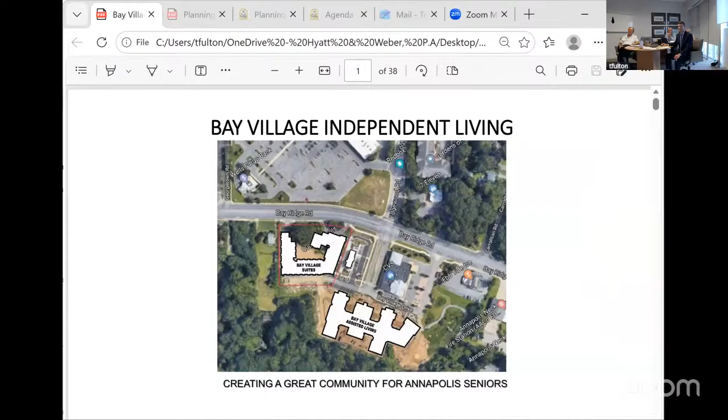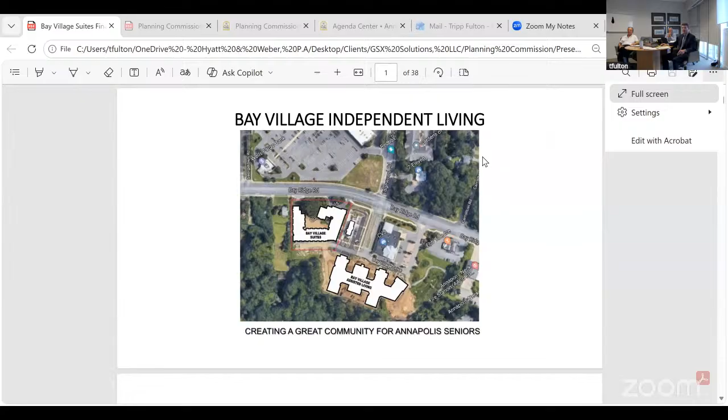There's a way of making this full screen, forgive me. I think that's about as big as it gets. Oh, I had it full screen, there we go. There we go, there we go. It always screws things up, technology.

I'll just stick with it like this. Can you see this screen, Mr. Chairman? Yeah, we can see it. Excellent. John, would you mind introducing yourself to the Planning Commission for me?

I'm John Grant. I run Grant Architects. I'm a registered architect for 45 years, and I actually lived in Annapolis down the street for 33 of those years. I lived down right off the street to the right there, about a mile and a half from the site. I used to drive by it every day and look at it. Subsequent to all that, I came to acquire the site as a developer and architect.

We actually acquired both sites, and one of the important things about this site was trying to create an architectural connection between the two projects and make it contextual so it fits in with our neighborhood. We spent two years in meetings with the community talking about how we could better design the building. Those meetings were very fruitful. They came up with the courtyards and the tree that we saved, and a number of different things. I think as we go through this, you'll see there's a lot of thoughtful things about this that are going to make it a much better project and something the city will be proud of.

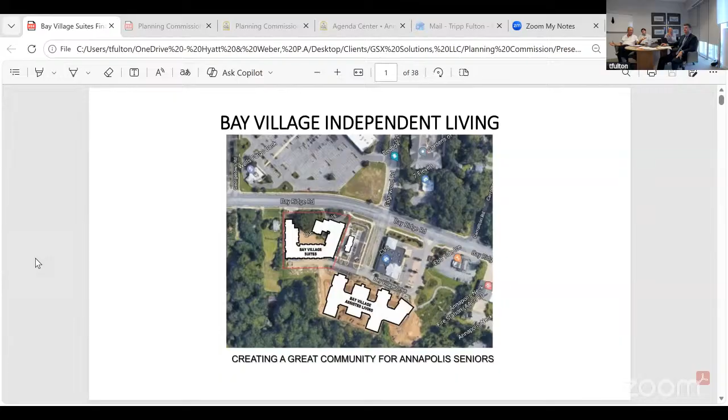Yeah, since we've basically seen this all before, you can go fairly briefly.

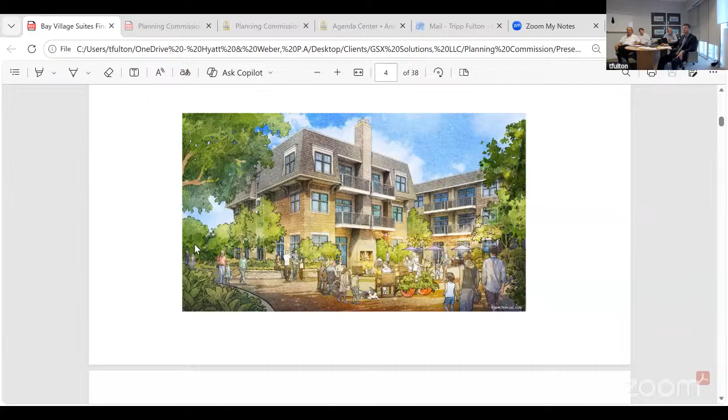The nice part about this is it is sheltered from the sun, so it will be a cooler space—not going to be very hot in the summertime as we're all experiencing today. This is the fire pit right there and the elevation of the building. We're using shingles. We have integrated the same shingle colors and material colors and styles as the assisted living across the street.

These are some contextual studies. The building on the left is the porch on the assisted living, and that porch actually looks at the Starbucks drive-through exit. In fact, in the morning everyone sits on that porch and makes comments about people driving through—it's great, the Starbucks. But as you can see, our facility is on the right-hand side.

There's a rather large sitting area outside, and we have parking under the building, so we don't take up any space on site with parking. You don't have to look at parking all day long, and we don't create a heat island with parking. Everything as far as parking goes is happening inside the building. On the first floor, we have a fitness center, parking, general staffing, and kitchen.

This is the view from a little bit further back. You can see where the Starbucks is and where that drive-through is, and the front end of our building. So this was a contextual study. I just wanted to show you those, knowing that when we went through our original planning review, we proved how this building contextually met the standards of the existing neighborhood and area.

Hey John, Diane Butler's got a question. Sure, Ms. Butler, you got a question? Yeah, if you could flip back to the last slide, that would be terrific. One second.

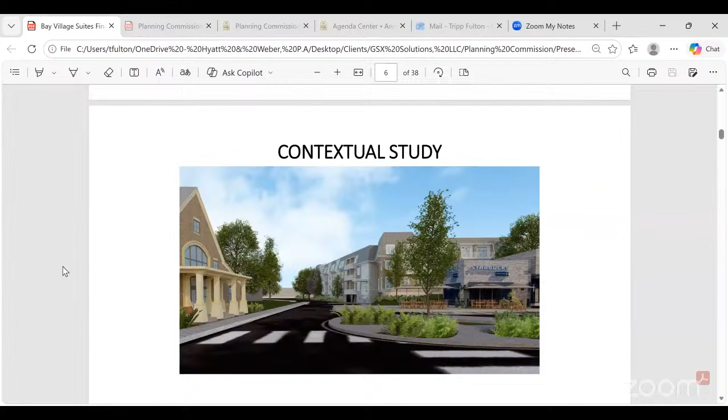I think this slide does a great job of depicting the differences in the architecture between the two buildings. I'm wondering, why didn't you go with a consistent theme with the existing buildings for assisted living? They're drastically different. I think it looks a little odd personally, but what was the thought process in making them so different? Actually, this rendering color-wise is correct. The colors are pretty close to the colors of the assisted living, and so are the materials with the shingles.

I'm not sure. You have to understand, this all happened and was put together in 2019 and 2020, so there's been some evolution in terms of the elevations, but the renderings I showed you from the internal side are pretty much right on in terms of color. You want me to scoot back to them?

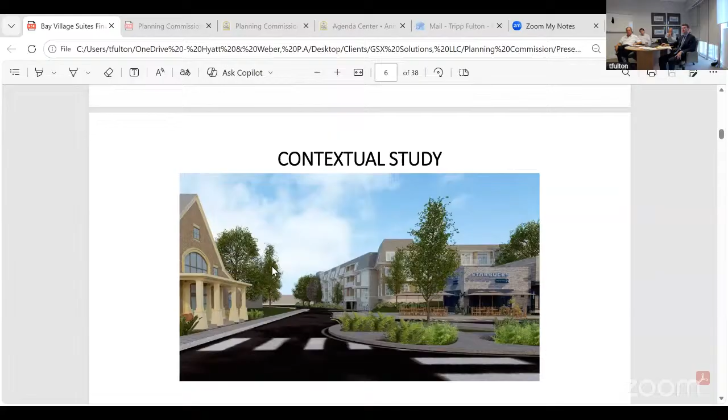Yeah, it's interesting, John. It's really not the color at all that matters. It's that kind of, I don't know what that roof type is called. It's not mansard, but it's just totally different.

It's a mansard roof, and when we went through the project study, since they wouldn't allow us any additional height, because we originally planned it with pitched roofs, they forced us to go with mansards, and as a result we had to saw the building off the top, so to speak. That pretty much is it, from the front and the back. We actually thought it would have been much better if we could have bumped the roofs up a little bit, but there is a hard cutoff, I think at 45 feet.

If you could get an exception, would you do that to make it fit and create more consistency in the architecture? I'll put it this way—I'm not unhappy with it as is, because the buildings are not the same building. One is a residence for seniors, and the other is assisted living, which requires more care. It's flatter and laid out that way because we're dealing with a lot of non-mobile people, moving them up and down hallways. So I don't mind having two things that aren't exactly the same. The materials will bring the two together, and also the two management companies will be the same—Sunrise will manage both facilities. So I don't think at this point it would serve us to go beyond this, because this was what was approved.

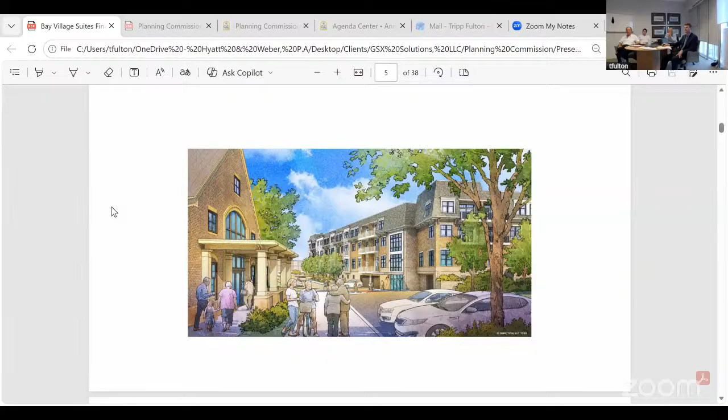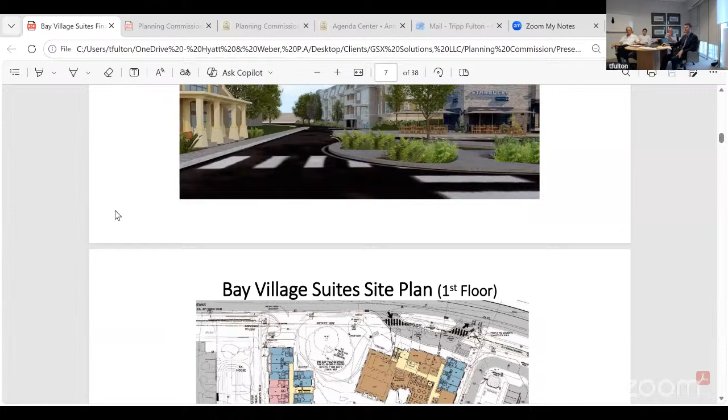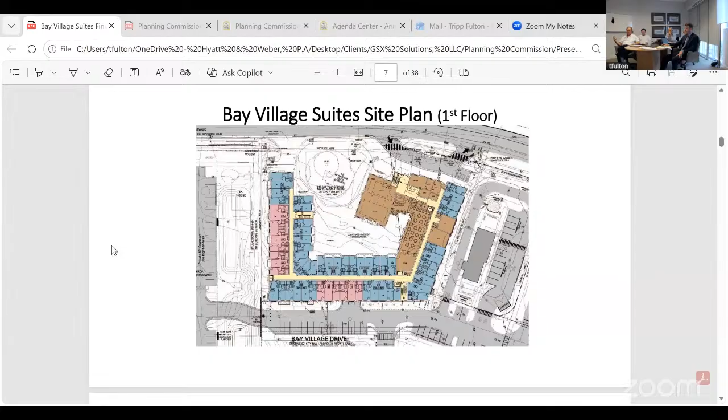Keep going—so that's a parking garage on the first floor. Well, you want to drop down to the first floor plan. So the first floor plan here shows where that courtyard is, and Shelley will get into it in greater detail. As you can see, up in the upper right side of this plan is all activity space—living rooms, dining rooms, a bar, outdoor meeting rooms, a fitness center, and things like that. Then you have a collection of apartments, and these are not assisted living units, these are actual apartments—1-bedroom and 2-bedroom apartments that give people a sense of still being in charge of their lives. There's a kitchen in there, but they get 2 meals a day along with the package.

This is the first floor. The parking garage is fed off of Bay Village Drive from the back. We have a number of lobbies in here, and 78 parking spaces—either 78 or 77. So we have more than enough parking spaces for the seniors who live here. I read that the requirement is 79, and including the street, you've got 86, so you're supplying more than required. I had a question—I can't remember whether I asked this the first time around, but are the spots a la carte?

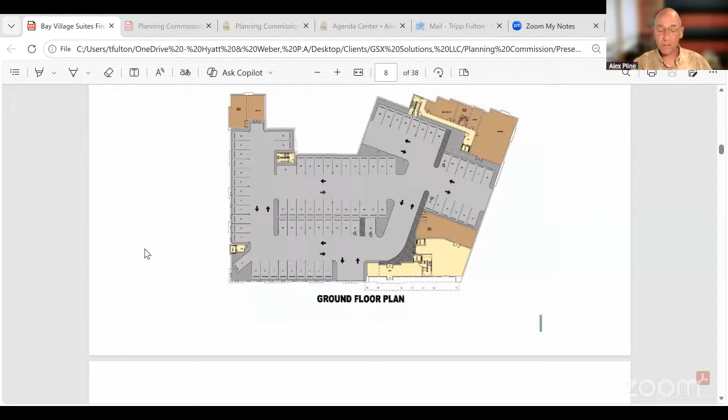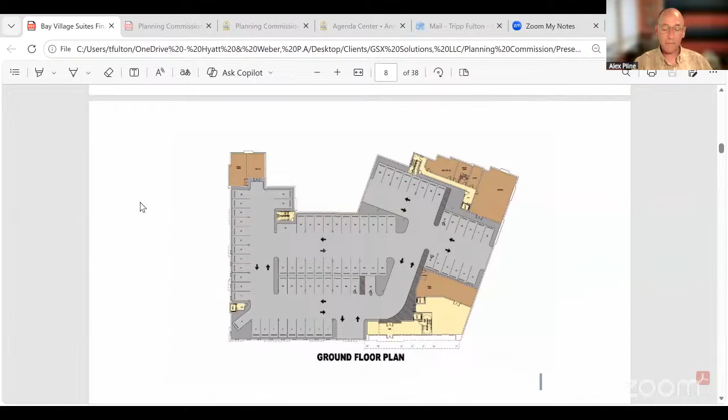So is it something somebody would pay for if they wanted it, but you don't automatically get one? Well, the indoor spaces are part of the payment program, and since the outdoor spaces are attached to us, we have to have those for our guests. You have 105 units and not 105 spots, so—yeah, at this age, Mr. Pline, not many of these people will still have cars. I understand, but I'm curious if you want a parking space a la carte, you basically have to pay for it. Yeah, if you have a car, you're going to pay to park it in there. I like that, because that way if somebody doesn't have a car, they don't have to pay for it. Oh yeah, it's totally a la carte.

That's the first floor plan again. Keep going. And that's the second floor plan, which is all residential.

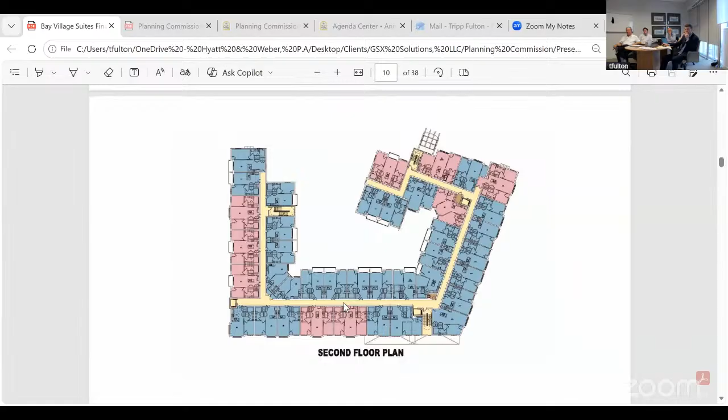You can see we have 3 elevators around the building, so that you have the vertical connection at all points of entry: the garage entry, the front entry, and the rear entry.

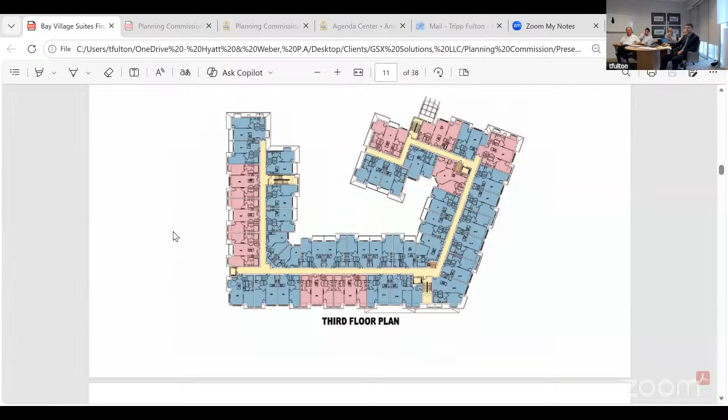And that's the third floor. It's the exact same as the floor below, so we have a nice mix of 1-bedroom and 2-bedroom units.

This is the shot coming in right there where the CVS pharmacy is. You can see the Starbucks and our project in the background.

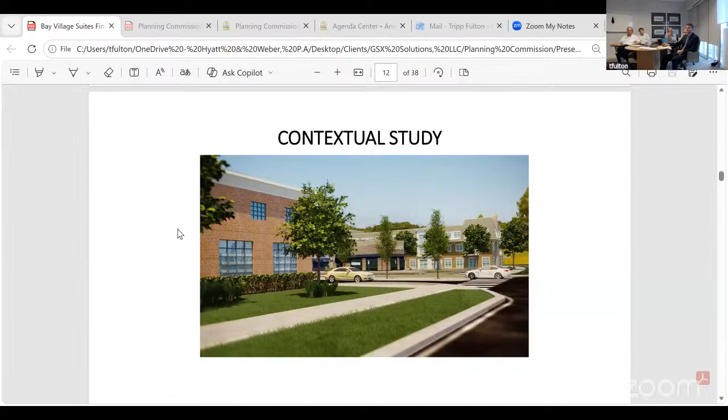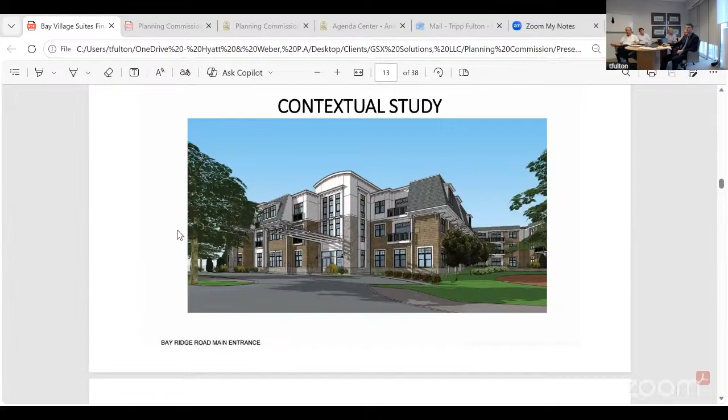And there's that front entry coming in. There's a porte cochere there to drop people off, and a space for people to drop in and out. A number of these people will probably order Ubers. I think it's only $5 to Uber to downtown.

And along the rear, we have a large outdoor porch at the back with seating. So it allows people to sit along that street in the back and animate the street a little bit, and also creates a stopping place for people as they walk between the 2 buildings.

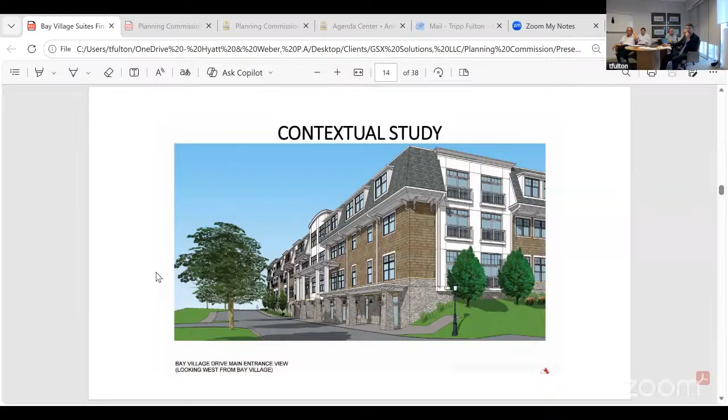So that's pretty much the site overview. Turn it over to Shelley.

We're actually going to skip over to Terry Schuman. Before I do, I guess I'd ask one more time, Mr. Chairman, if you or any commissioners have a question for Mr. Grant, we're here to answer them. Yep, I don't. I'm sure other commissioners will chime in if they do, but thanks.

I'll turn things over to Terry Schuman. Terry's our civil engineer on the project. He was the engineer of the first go around.

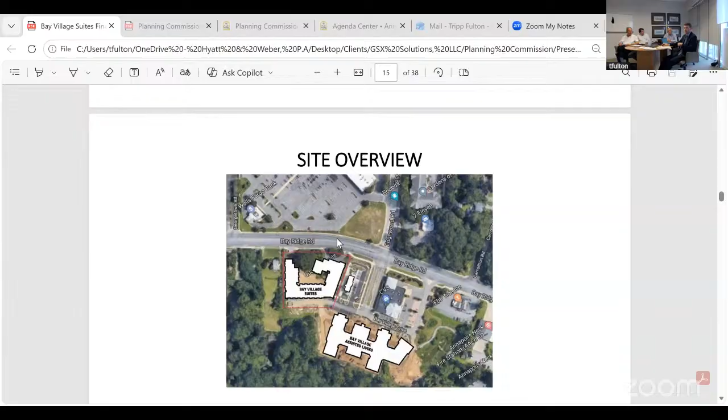Terry, do you mind giving your name and address for the record? Everybody, Terry Schuman, now with Atwell. Previously I was with Bay Engineering, and now I'm with Atwell, same company that just took over Bay Engineering. So I've actually been on this job since 2004 when we first started.

So Bay Village subdivision is with the 4 lots. This is the last lot now being developed. The other 3: the CVS first, then the Starbucks, and then the assisted living.

And I just wanted to point out, from that plan right there, this is the limit of the city for our 10-acre subdivision here for Bay Village. Everything on the left and the right and the south are in the county.

And then the city limits go back on the other side of Bay Ridge Road. So we've got Bay Ridge Road on the top, we have Bay Village Drive in the middle of this site, and that serves the three developed lots, and then our future lot 1 is what we're calling it.

Again, our site is 1.8 acres. I'll point out too, the Quantum Sales was not in the original subdivision back in early 2008 when this first started. That has now been purchased by GSX and eventually will be consolidated with lot 1 and with Bay Village Drive as now the new lot 1 for this project, which totals 1.8 acres. It also has an address of 960 Bay Village Drive, and the Quantum Sales is at 951 Bay Ridge Road.

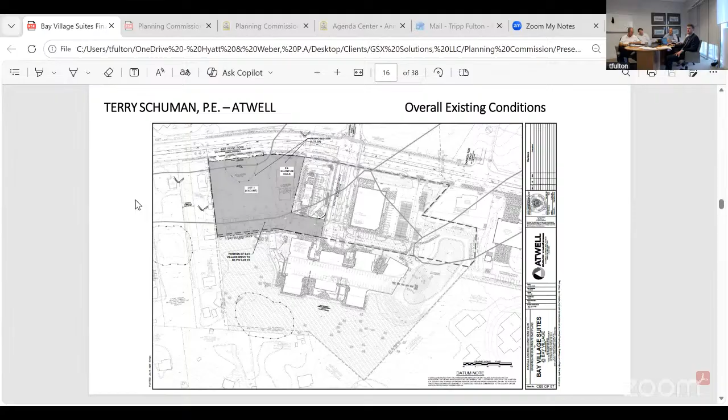You can move on to the next one.

So a couple things on the existing plan. The circle up top there, that's the critical root zone for the tree. It's a 52-inch white oak, considered a specimen tree because it's over 30 inches in size.

And that, as well as the topography. The topo goes from about an 8-foot elevation difference from Bay Ridge Road down to Bay Village Drive. So those two features really designed that site. We were attempting to save the tree and also work with that topography. So if you go on to the next plan.

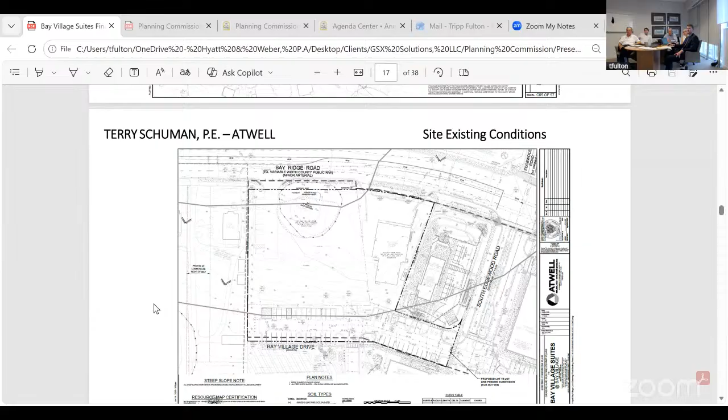And that's just an overall plan, and that shaded area there is essentially the building. From the views from Bay Ridge, it's 3 stories over top of a parking garage, and you access the parking garage off of Bay Village Drive. That makes up that 8-foot elevation difference between the two. You can see the tree there is being preserved, and the building was designed around that.

As indicated before, Bay Village Drive will extend to the property line. We are regrading Bay Village. If you go out there today, Bay Village Drive is already paved. When we were working with Lidl on the connection, it was too steep a grade, so they're going to have to tear that road up with this application where the entrance is, and it will be regraded so the profile of the road works better with the grades.

We didn't have the connection in mind in the beginning, and now when Lidl came through, we modified that road, and with the future development of whatever it will be, we'll have a roadway that they can connect to.

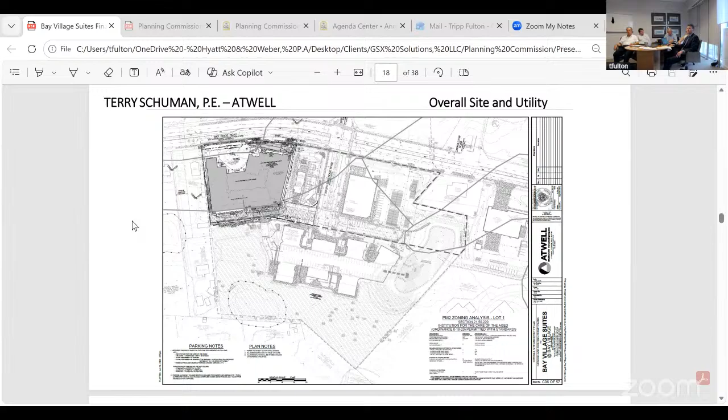Moving on to the next plan, that's a blow up of the site plan. I just want to point out we do have an access off of a drop-off area in the front of the site off of Bay Ridge Road. It's a one-way directional, and I think you'll see from the Mead and Hunt traffic study, one of the things they conditioned it on was they didn't want left turns coming out of that, so it's essentially a right in, right out access point.

We also have an access point down at the bottom that will access the lower level garage. As indicated before, 79 spaces are required, and we have 86 — 76 in the garage and 10 in the surface parking for the site. Those surface parking spaces are essentially for visitors, as John Grant indicated before.

So on Bay Ridge Road, to prevent the left turn, will there be some road work that puts a barrier in there? The reason I ask is I hear there's some discussion about changes to the geometry of that road. Just want to make sure those aren't related.

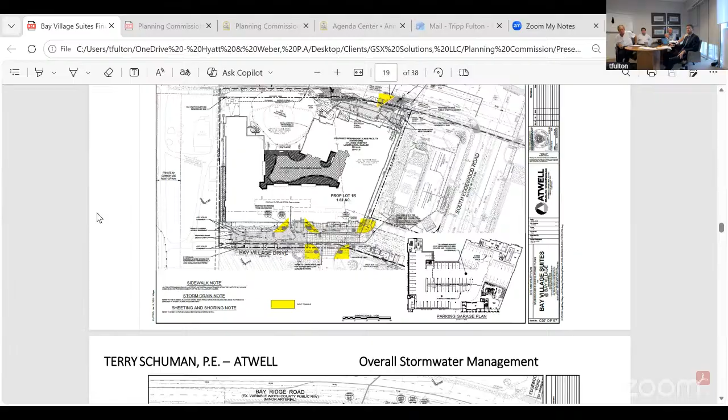That's just a grading plan in more detail. I think you could probably move on to the next slide — just going to go to the stormwater if you want. Keep going. Well, yeah, actually, let's leave it there.

And to answer Ms. Wagner's comments: Lot 1R has been designed using ESD, or Environmental Site Design, to the Maximum Extent Practicable, the MEP. So we did ESD to the MEP. Everything is classified as new development for this site, and we included the quantum sales when we did our stormwater, and really the stormwater has not changed. It does meet the 125% requirement, and we are proposing 4 surface micro-bioretention areas around the site.

We have an urban planter box that's up against the building that treats the runoff from some of the rooftop. We have some permeable pavement on the parking spaces off of Bay Village Drive. And then we have a Filterra device, which is essentially an ESD device accepted by the state on Bay Village Drive as well, that treats runoff. And then we have our green roof areas that Shelley will show you a little bit more, the shaded areas in the middle there that'll treat the rooftop for water treatment. So those are all our ESD devices.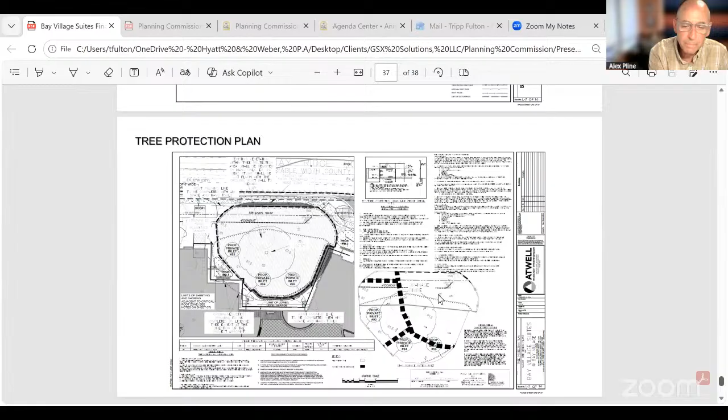Shelly Rentsch to touch on some landscape architectural features. Again, these are the same plans that were originally submitted. I'll try to keep it brief. Shelly, you want to tell us what we're looking at?

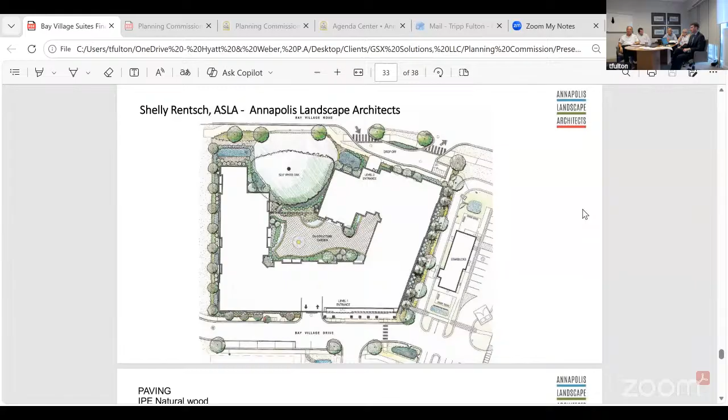This is an illustrative site-wide landscape plan. It illustrates that we've maximized every square foot of opportunity to plant within the site. The architectural design, civil engineering and all the planning created this amazing opportunity for a very large garden courtyard, really the heart of the project, the heart of the program, and the visual heart of the project. The garden courtyard, enveloped by the building, is roughly about 60 by 120 feet. It's not a rectangle, but it gives you a sense of scale.

It's quite large, and all of the edges of the courtyard are custom curved precast benches, so there'll be a lot of linear seating all around the edges of the open space. Those seat walls will have integrated wood seating benches that will soften up the feel of the space. I'm pretty excited about the paving of the courtyard because instead of using a hard paver, we've selected a natural wood modular paver, which will create a much softer environment.

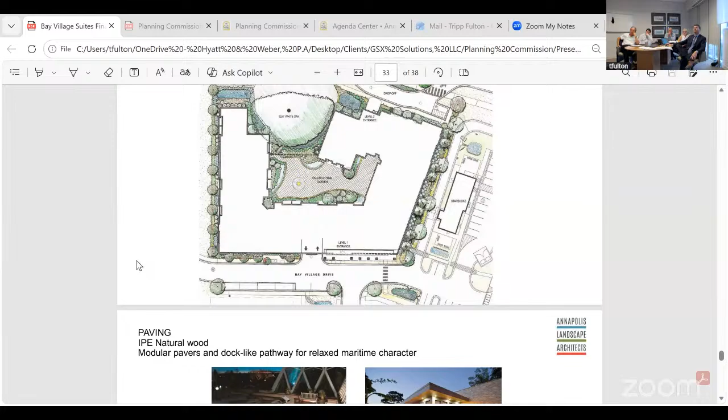We'll start to talk about the theme of Annapolis and the Maritime. Around the tree, we've had to hold back all the planting off the critical root zone at the request of the city, but all the area we can plant is heavily planted with ferns and other natives. Honestly, over the years, some of those ferns will probably creep in under the tree, but that's future reference.

The street trees on Bay Ridge Road are London plane trees, which get a very broad crown, appropriate for a road of that scale and speed. As Terry mentioned, on the east and west side of the building there are integrated stormwater planters. On Bay Village Drive, we've essentially planted out as much as possible. Let's go to the next slide.

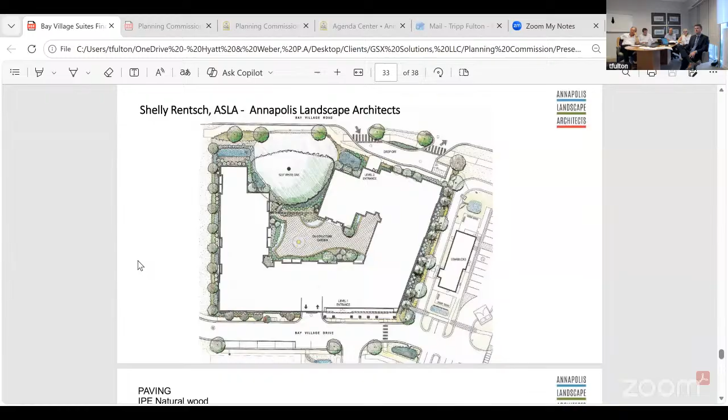I think the upper left image really captures what we're doing in the courtyard, probably the best aside from John's amazing renderings, where you have the flowing curved walls, there's seating walls, but they're also serving as the planter walls. So we're having to establish enough planting soil for full depth planting. We've got some crepe myrtles and a lot of different woody shrubs and herbaceous plants.

We also have a community herb garden and some other kitchen gardens, some small plots, around the grilling area, which actually opens directly to the interior dining, so the interior uses and the courtyard uses are integrated. I think it's really going to have a lot of activity because it's pulling all these different uses together, with such a generous perimeter planting. Let's go to the next slide.

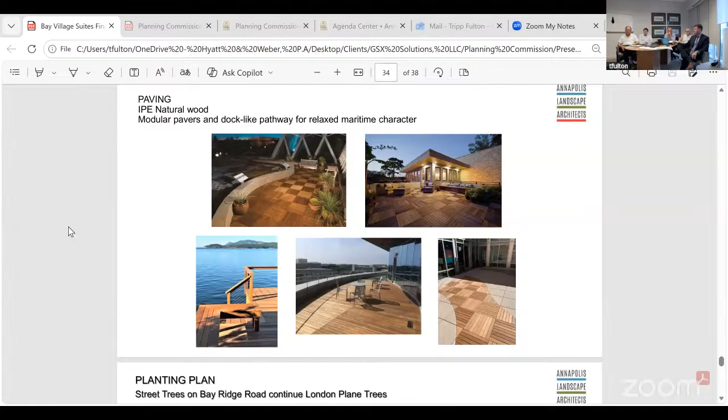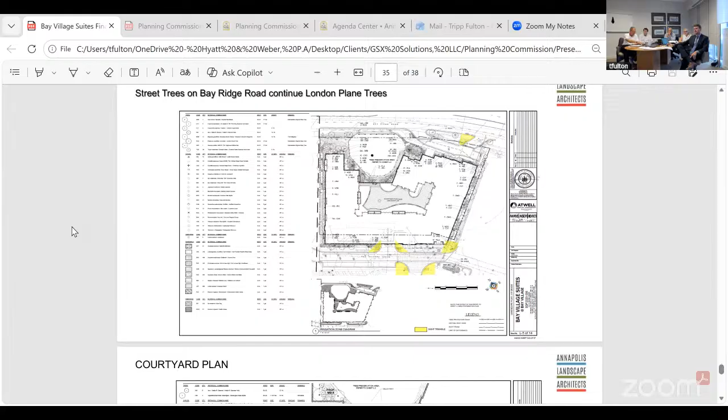This is a technical planting plan, but if anybody cares to get into what every last plant is, it's all here. As I said, we've maximized every square foot of planting that was available. Most of it's irrigated, with the exception of the stormwater management planters on the sidewalls of the building, which, when you're on structure, you really need to do to keep things healthy, because the whole system is designed to be well drained.

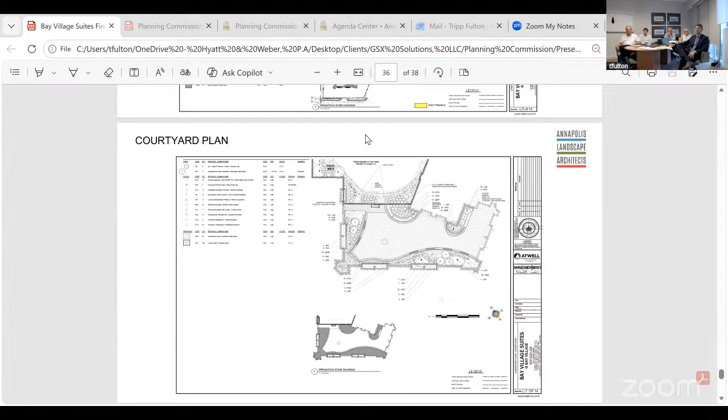In this courtyard planting plan, you can see the slightly darker shaded areas along the planter walls. Those are all the wood benches on top of those planter walls. You'll be able to sit on the entire planter walls. We wanted the wood option because it's softer and integrates with the approach to paving.

That one floating circle in the courtyard is a 6-foot diameter Corten steel fire pit that will create a center point of use. In wintertime, it'll be great — I think there's going to be people out here all the time.

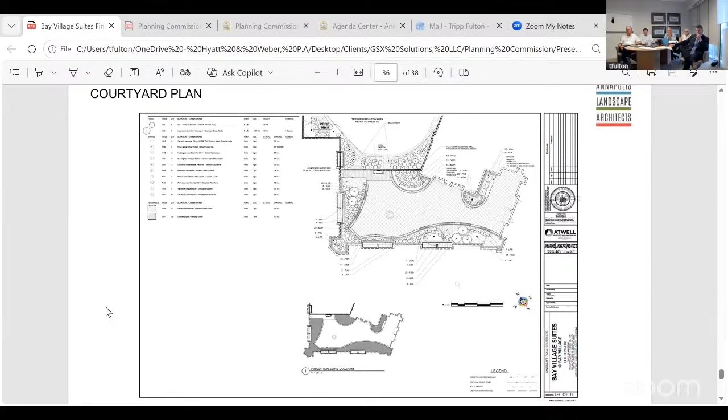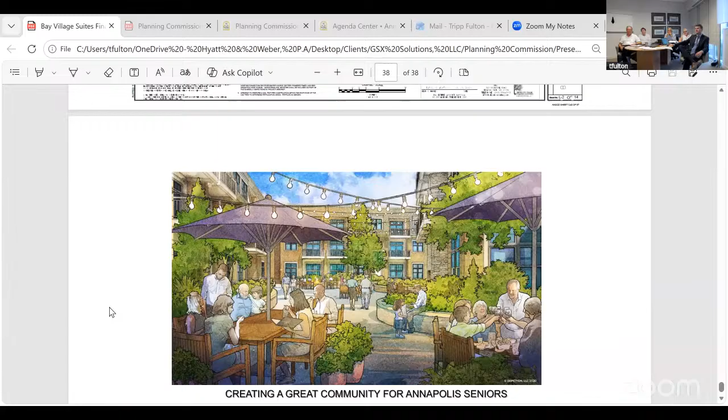You can actually walk right off the edge of the courtyard out towards where the big tree is; there's no wall or fence there. The next slide, the tree protection plan, which we already went through, and the last graphic is the closure slide, which gives you a sense of how active we anticipate the courtyard being, with people enjoying the garden, enjoying the space, enjoying being together.

And that was the idea behind the entire Bay Village Suites Project. It's really creating a great community for seniors, with indoor and outdoor space at a level that Annapolitans really are used to, and we'd love to provide for them. So that's what the project's about.

Diane, you have a question? Shelley, great job. I like the way this looks. It really shows some of the things I was hoping to see. For some reason in the presentation we got online, we could not see a couple of slides, including this nice living space community area, but it was good to see it again.

I'm not a fan of crepe myrtles, they're not native. Would you have any aversion to substituting native trees where you have crepe myrtles planted? No, we could swap that out for different understory native trees, like redbuds or dogwoods. All these plants have pros and cons, but I'm sure the project team wouldn't mind swapping out those 3 key trees, since we didn't want to overburden the courtyard with too many heavy, large trees. Those 3 trees would be carefully selected because they need to be specimens, so we can focus on making sure they're brought in high quality.

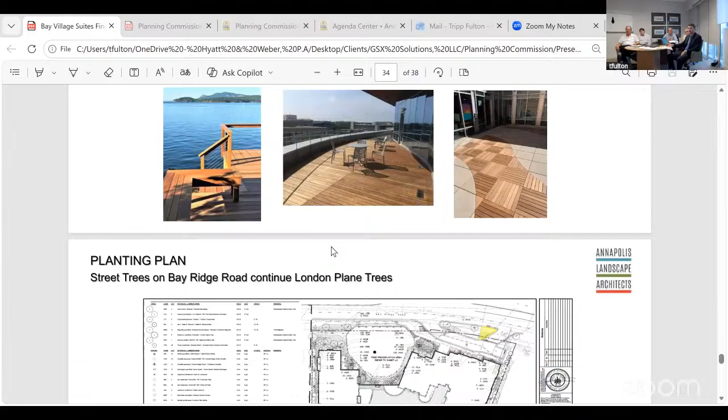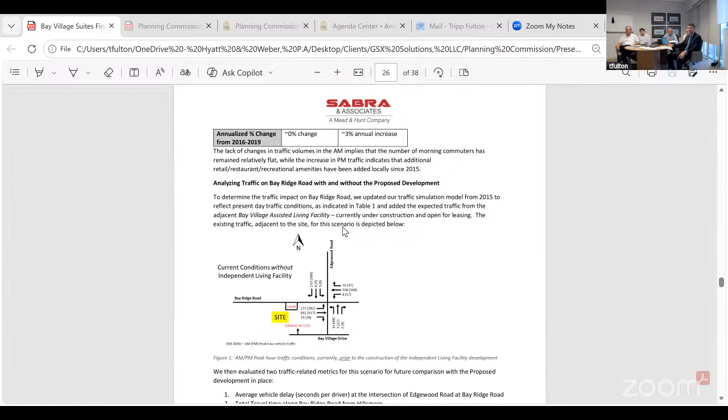It's just a copy of that Mead and Hunt certification of the traffic impact analysis. Yep, we have that in our package. It's included here. I didn't want to skip over it purposefully. The applicants don't choose the consultants, I think the city does. This is the item Mr. Meekins was referencing earlier, and it's included among your package.

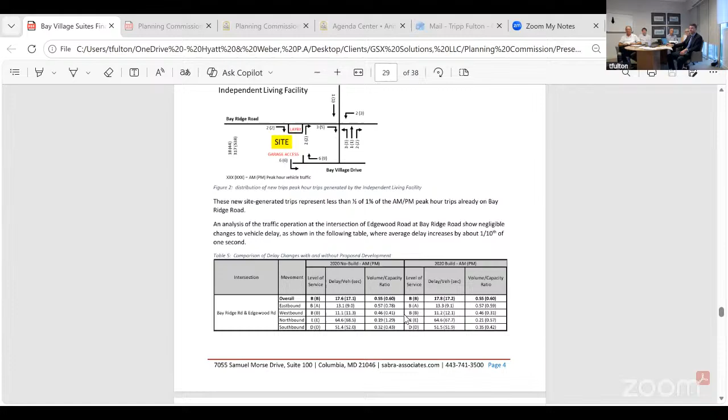So with that, I'll turn it over to John in case he has any parting words. Well, this is a project we've wanted to do for a long time, but because of COVID and because the seniors marketplace was in shambles for the last 4 years, we couldn't get it moving. With the help of Sunrise as our new partner, it's been amazing, and everything has been moving forward. We'd like to build it and complete the community.

And I put that back to you guys. If you could help us get this thing underway right now, we'd love to get it under construction in the fall. All the drawings are basically in planning and zoning. I think, Terry, you're pretty close to a grading permit, right? Yes. So we'd love to move this thing forward. It'll create a lot of jobs, both in construction and ongoing operations.

Okay, well, thank you for the presentation. Any commissioners have additional questions before we move into the public hearing? I have a question about the timeline. If you're able to get everything in place and start construction in the fall, what's your timeline for completion of the project?

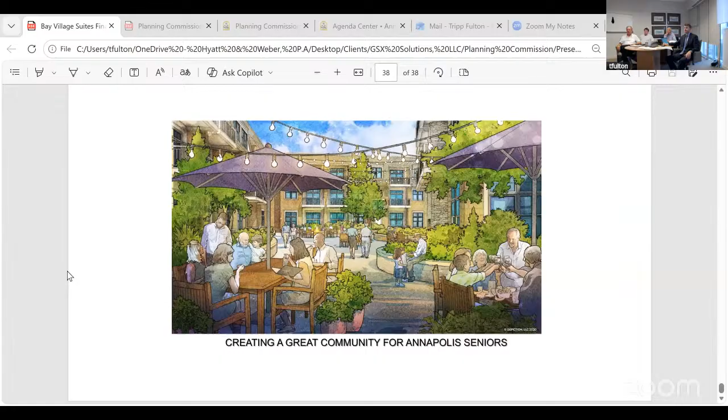It'll be 18 to 24 months, and we can provide that to you guys. We have to excavate and put that parking garage under it, and do a very careful job of sheeting around the ball of that tree to make sure it's preserved. So it's not going to be the fastest process, but it's going to be a careful one. We have a great building group to do the project, so we're pretty excited about it.

Okay, great. Thanks for that. Okay, so at this point, I will open the public hearing. Madeline, please bring forward the first person. It looks like we have one or two people who want to testify.